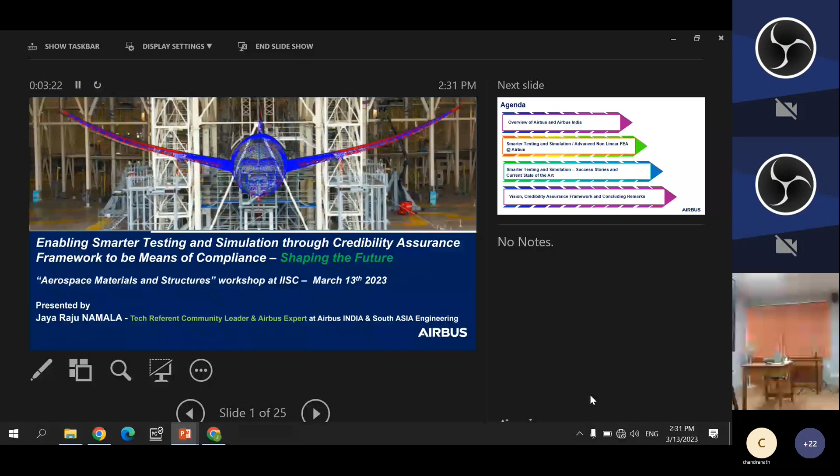So before getting into the topic of our interest, which is advanced numerical simulations, I will probably give a very brief overview about Airbus. Then I'll talk about the technology, the vision, and how we are going to achieve it going forward.

So Airbus, I believe, probably doesn't need recognition, especially for those who are well versed with the aerospace industry. It's a world leader in the commercial aircraft segment and a global pioneer in general for the aerospace industry. We have a product family ranging from the A220, which we got from Bombardier to revive the program. Then we have the A320 family, which probably is the best-selling aircraft in the history of commercial aviation. Then we have the ever-reliable A330 and the new technology A350. And last but not the least, my personal favorite, and I worked a lot on this aircraft, the A380.

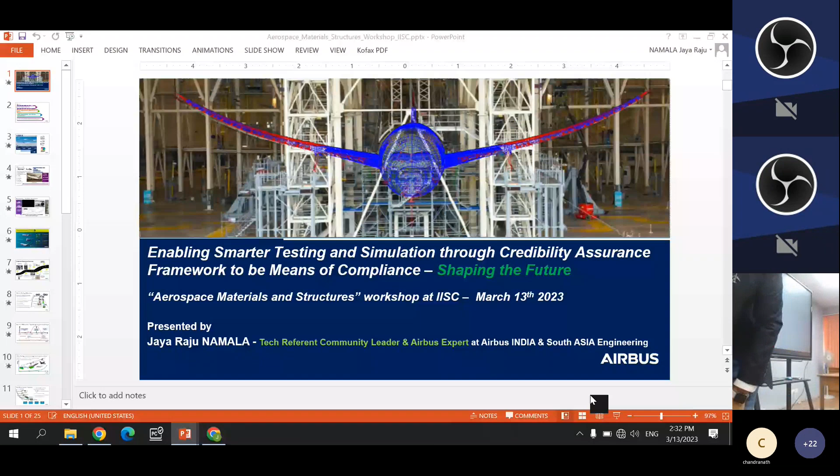Sorry for the interruption. No problem.

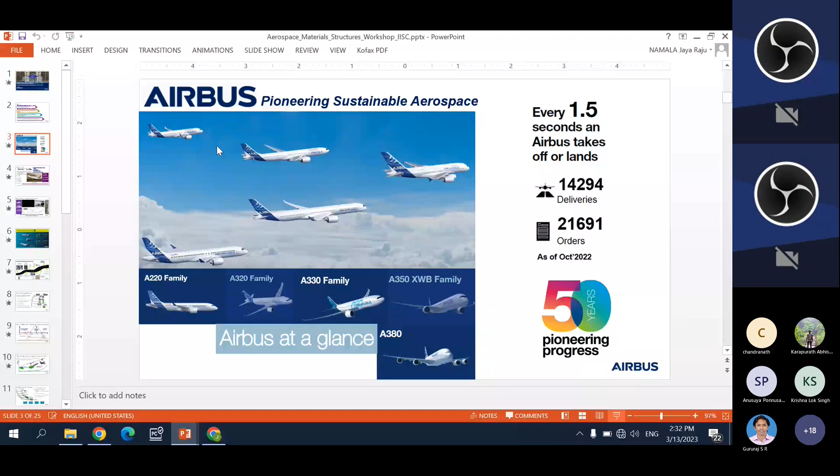Yeah, so I was talking about the A380. It obviously was loved by everyone for the comfort and the noise levels it produced. Unfortunately, it wasn't a commercial success, and we had to stop production of it a couple of years back. So I'll be more than happy if the market demand kind of grows again and if Airbus decides to reintroduce that into the market. I have a very cool stat which says that every 1.5 seconds, an Airbus aircraft either takes off or lands, thanks to more than 14,000 aircraft which are in operation. And I'm very sure this stat will only get better as we have more than 7,000 aircraft to be delivered to several airliners over the next decade or so.

So having talked about Airbus in general, I want to take you to the association of Airbus with India. It all started in the 1970s, even before I was born. By the way, I'm not that old. After that, Airbus did not look back. Currently, we command more than 70% of the fleet share and more than 60% of the order share. And recently, as you know, Airbus secured a massive order from Air India, and these figures don't even account for that.

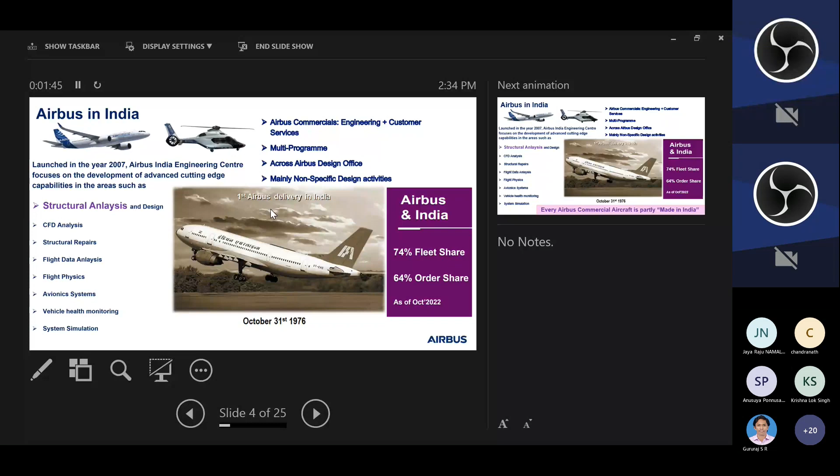In 2007, Airbus got into India and launched an engineering center. Now we have more than 1,200 engineers working on cutting-edge technologies such as advanced structure simulations, fluid dynamics simulations, and physical systems, avionics software, so on and so forth.

Just to name a few. But the fact that we probably can be quite proud of at Airbus is that almost every aircraft is partly manufactured in India, and this proportion is only going to go up with the push the Indian government is placing on major OEMs through the Make in India initiative. Airbus is very much committed to furthering it going forward.

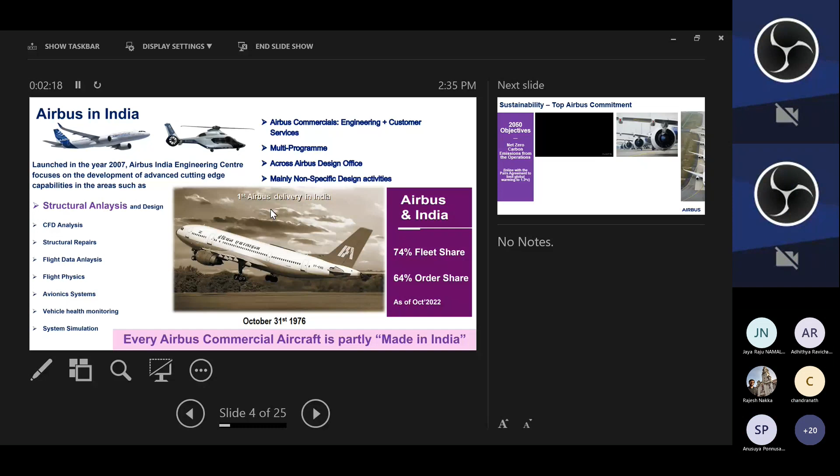So coming to the topic of sustainability. Looks like there is someone else speaking there. You asked a question about repeatability. Absolutely.

Coming to sustainability, currently the aviation industry is contributing more than 2% of global man-made CO2 emissions. Airbus is committed to reducing it and making the aviation industry sustainable, committed to 2050 net zero carbon emission compliance. This is in line with the Paris Agreement to limit global warming to 1.5 degrees Celsius.

But if you look at history, if you look at the relative fuel burn per seat from the 1950s to now, there has been a substantial reduction in fuel burn, thanks to the introduction of advanced technologies - in this case, composites. As you can see, there is a significant increase in composites from the start of this century. Now we have more than 50% composites by weight in the A350.

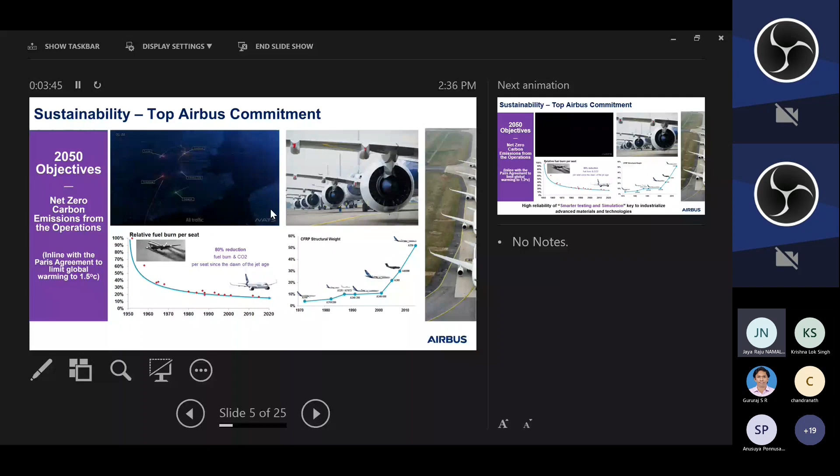This is where, according to me, we are going to introduce many advanced technologies, be it ALM products, be it functionally graded materials. And according to me, in order to industrialize it, advanced structure simulations is going to play an instrumental role going forward.

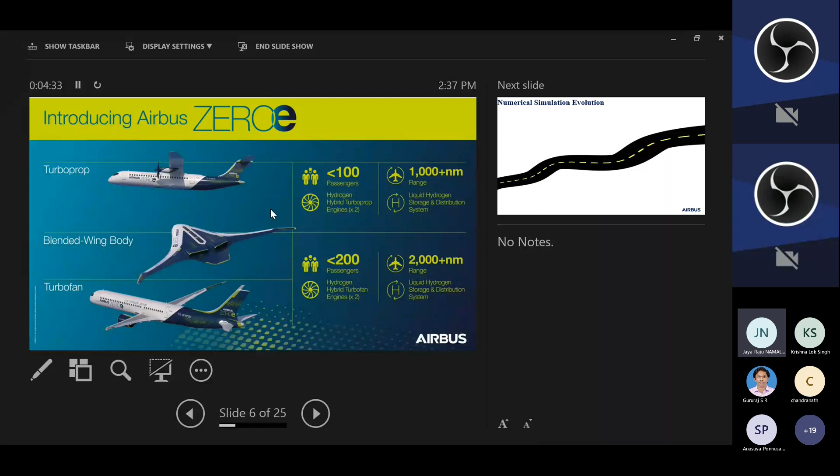And that probably sets up today's talk on numerical simulations. Just for the student community - professors who already know about the evolution can bear with it for a couple of minutes. It all started, as you know, from the 1950s, when the first paper on FEM was launched or released. I would encourage the student community to read this paper.

In fact, this paper also has recommendation sections, and probably the author Turner had great foresight. He recommended improvements to this technology, and I can tell you many of them are in place now. Needless to say, this technology has weathered the test of time and grown by leaps and bounds.

After the introduction of the commercial software NASTRAN, the industry adopted it, and currently we are using finite element analysis significantly during the product life cycle. At Airbus, we have been using linear and conventional FEA from the 1970s, but I would say from 2005, the usage of advanced nonlinear FEA has seen a significant increase.

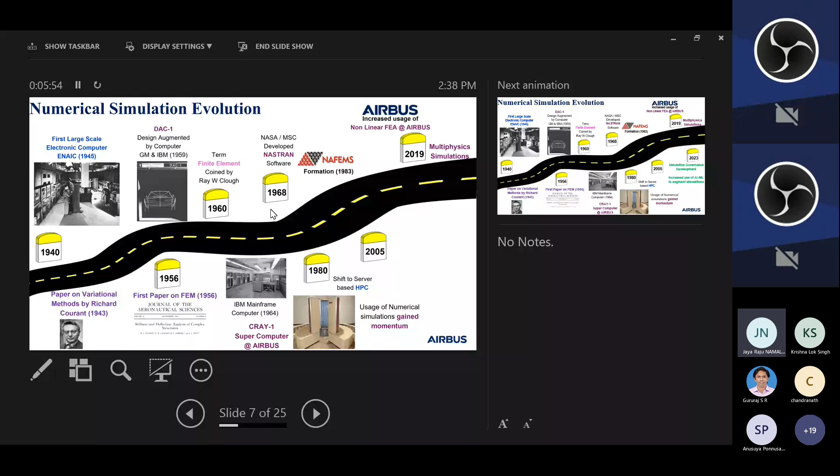And currently, we are actually looking at developing nonlinear FEA as a potential means of compliance by developing simulation governance at the industry level, which I'll talk about later. We are also looking at augmenting simulations using AI and ML technologies as well.

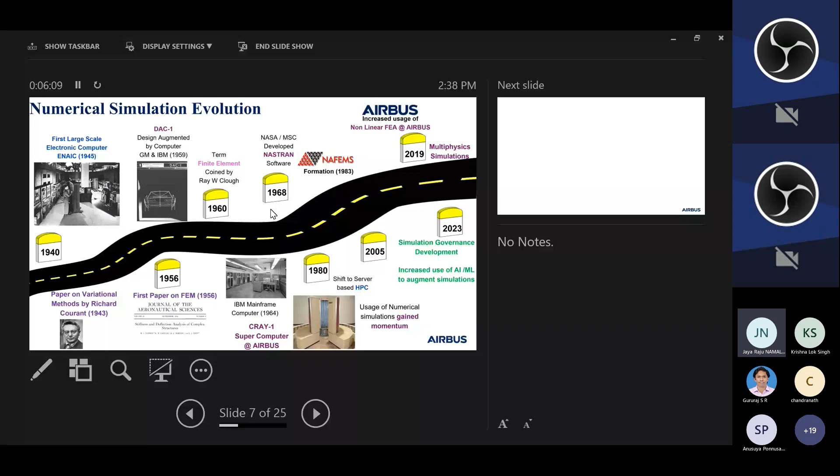So you all must be wondering, when will the topic actually start, right? Probably I think this is where the actual topic starts. The definition of virtual testing, according to me, is a representation of structure and predicting the structural integrity under diverse loading conditions using advanced nonlinear FEA.

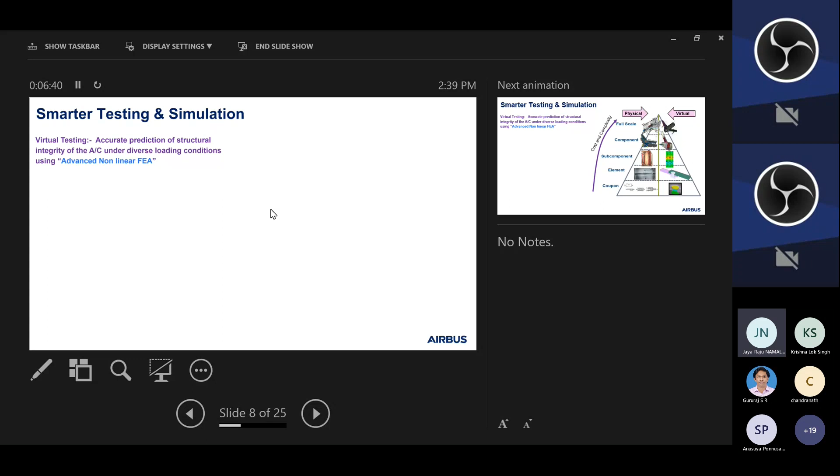Smarter testing and simulation is actually a marriage, according to me, between physical testing and virtual testing. You can see the word 'smart,' right? I'm not really sure whether people will agree that getting married is a smart move, right? But for the industry, this is where physical testing and virtual testing can support each other. I'll talk about it later, how they support each other.

Probably in simple words, physical testing helps in developing virtual testing methods. And virtual testing, especially at the upper level of the pyramid, supports physical testing in terms of de-risking them.

So we are talking about a significant increase in cost and complexity as we go from coupon to a full-scale aircraft level. Can anyone tell me a rough order of magnitude cost of a full-scale aircraft testing, which you saw on the opening slide, wherein the A350 was tested for certification? Rough order of magnitude. Yeah, obviously gross for sure - just some number in millions.

Okay, 300 to 400 crores. Right, anyone?

So we're talking about potentially much more than 100 million, depending upon the size of the aircraft. But probably even the smallest of aircrafts, we're talking about more than 100 million, and it is extremely important that we execute it properly.

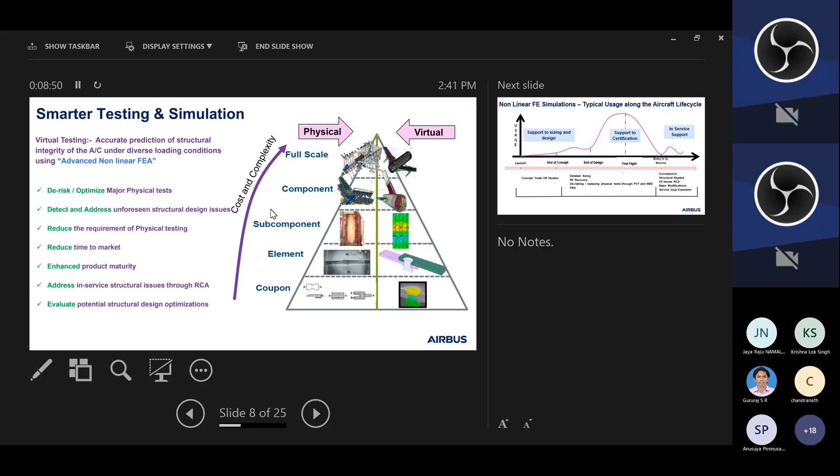So, as I said before, we use linear and conventional FEA analysis, and we use advanced nonlinear FEA. Linear FEA is mostly used during the sizing phase, during the design phase, where the structure is sized to approximate dimensions. Later, advanced FEA is used to validate the structure, to identify whether we have any unforeseen structural issues.

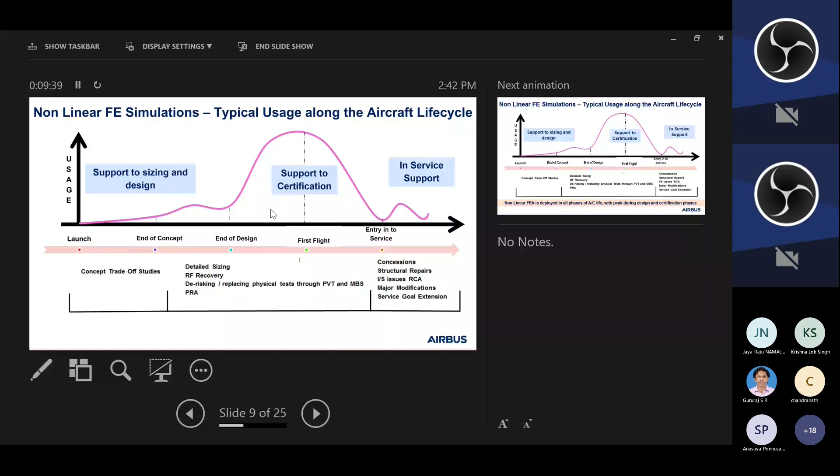So if we look at the usage of virtual testing, when I mean virtual testing, I'm talking about advanced nonlinear FEA, it's mostly used in the certification phase to de-risk structures and to support the first flight, and so on. Once we have it, we can also support in-service operations of the aircraft. But going forward, it will be very different. I'll talk about it when I share the vision.

I think this exponential increase was only possible due to advances in computational capabilities. We should also give due credit to analysis capability - commercial off-the-shelf tools I'm talking about - and the validated methods and processes within the organization. Last, and probably most important, is the people skills and experience we have gathered to use such advanced numerical simulations in the industrial context successfully over the last, I would say, decade and a half.

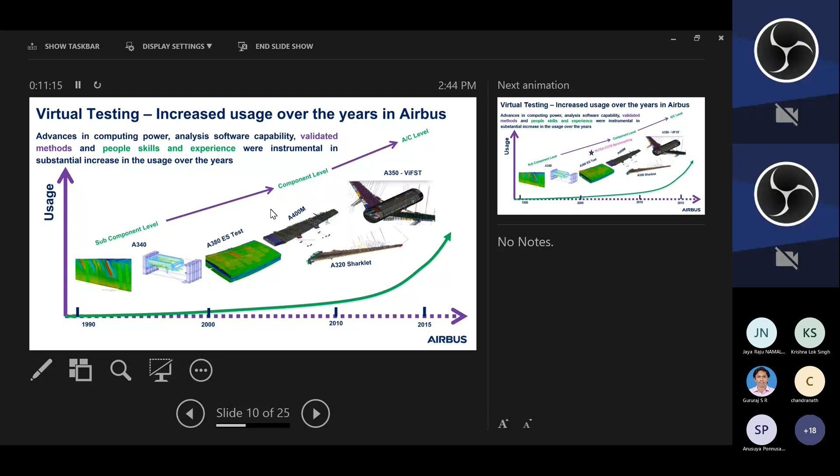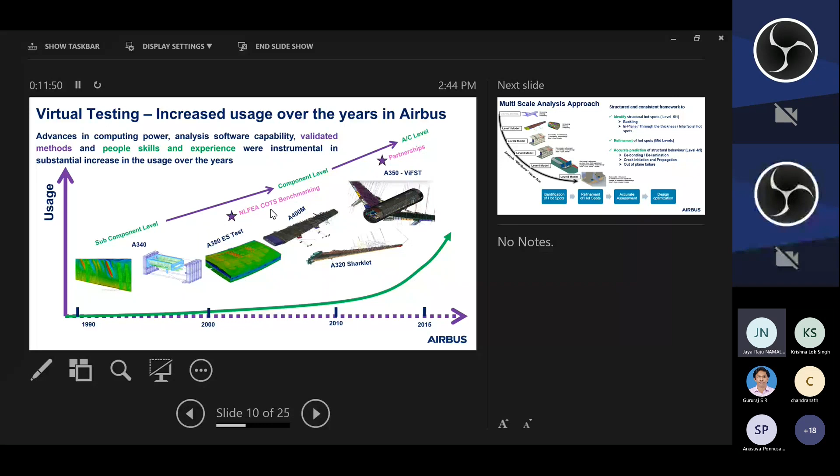We have also partnered with several commercial off-the-shelf tools. In fact, we did a benchmarking in 2005. We assessed many commercial off-the-shelf tools, without naming them, and tried to benchmark them against the quantities of interest generally needed to assess structural integrity. We happened to select Abaqus for advanced numerical simulation. But having said that, the usage of Nastran is significant in the linear FEM domain, as I just mentioned before.

What is also very important is to have a structured and consistent approach to assess structural integrity. In Airbus, we use a multi-scale analysis approach. We start with a very coarse aircraft level model, subject that to diverse loading conditions it can experience in the field, then deep dive to understand local structural behaviors much more closely. Generally, the aircraft and component level models are used to identify structural hotspots.

Potentially it may just identify the hotspots, but we may not understand the root cause. This is where we need to deep dive further. We have, as you can see, levels 3, 4, 5, and detailed models, wherein we capture the structure much more closely, both in terms of physics and geometry, to understand the phenomena very closely.

What you can actually see is, as you go from level 0, level 1, we increase the fidelity of the models. But in the industrial context, it's not just important to have an increase in fidelity - what is also important is to have validation at each and every fidelity level. This is where we carry out physical testing, as you can see, at the coupon, detail level, subcomponent level, aircraft level. So every level you see here has a corresponding physical testing level which is used to validate the fidelity.

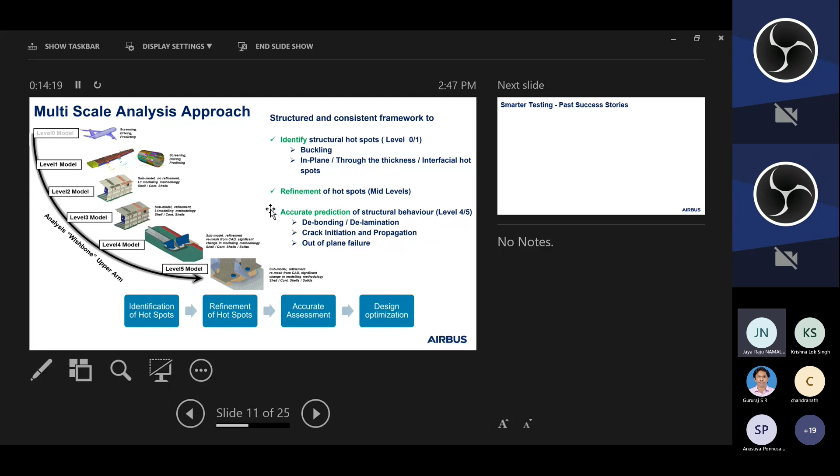So the message I wanted to pass on from the previous slide is mostly the rigor we place in the industry on the validation of every level of multi-scale analysis and every fidelity in terms of representing physics and phenomena.

So having talked about nonlinear FEA, I probably need to also ensure that I keep the audience awake. I would like to give you some success stories. Probably you can connect to them better.

So I talked about the A380, right? How many of you know the A380? All of you? Are you guys aware of it? We all talk about the A380, about the noise levels and comfort it offers to passengers. But an incident happened during the development of this aircraft, during the full-scale static test. The requirement generally is to demonstrate ultimate load capability, which is generally 1.5 times the limit load, and roughly 2.5 times the operational load capability. But the requirement is quite stringent.

And during the physical full-scale testing, both wings of the aircraft failed 3% lesser than the ultimate load. This happened in 2005, when we didn't have the capability of advanced nonlinear FEA. This kind of situation...

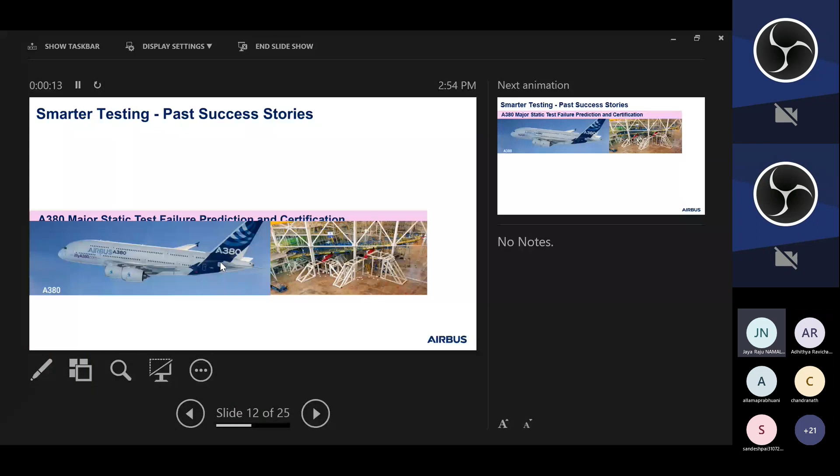So this is one of the important success stories for Airbus, which actually led to increased usage of nonlinear FEA. This happened during the development of the A380, when the requirement was to demonstrate ultimate load carrying capacity. But during full-scale testing, both wings of the aircraft failed just 3% lower than the ultimate load. I was also reminding you guys about the cost of physical full-scale testing, but more than that, the complexity. If you want to redo the test, it may potentially delay the program by, I'm not really sure, probably months or even years, which an organization like Airbus obviously cannot afford.

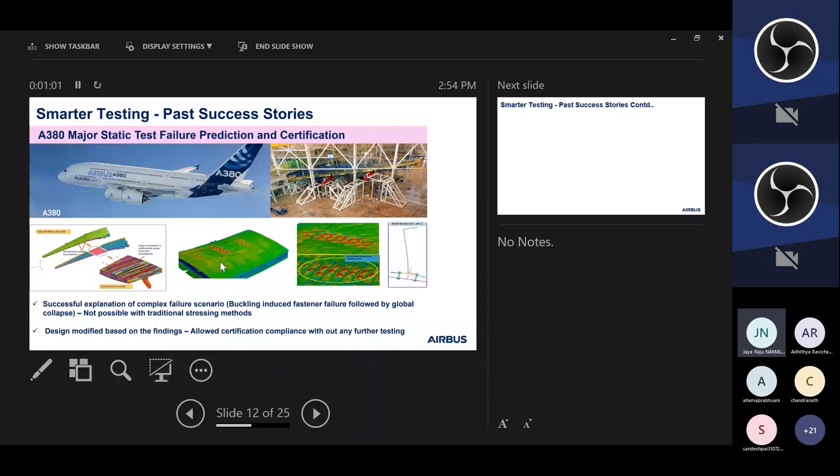This is when we developed subcomponent level models, as you can see. Probably you guys can predict what kind of behavior it is on the top cover. I think Xavier has already talked about it. As you can see, we saw significant buckling. It started with local buckling, and then almost global buckling of the structure, affecting different portions of the cover. It's the advanced nonlinear FEA simulation which helped us not just predict this, but also understand the root cause. Here you can see it is a fastener failure between the stringer and the top cover, which led to an increase in the unsupported length between the stringers, which led to top cover buckling.

This was almost 1.5 decades earlier. We presented these results to the certification authorities, EASA and FAA, and demonstrated the very good agreement between virtual testing and physical testing in terms of predicting local strains in the vicinity, because that's extremely important. You might demonstrate it using nonlinear FEA, but what is the credibility that that's the fact? This is where validation helped us gain their confidence, and we were able to avoid the retest of the A380. Numerical simulation was used to optimize the structure, and without the test, we were able to certify the aircraft. So this was a watershed moment for Airbus, and it significantly increased the usage of advanced nonlinear FEA in Airbus. I need to also mention this was before I joined Airbus, so I don't have any contribution to it. It's in fact Morten who led this program and made it work for Airbus.

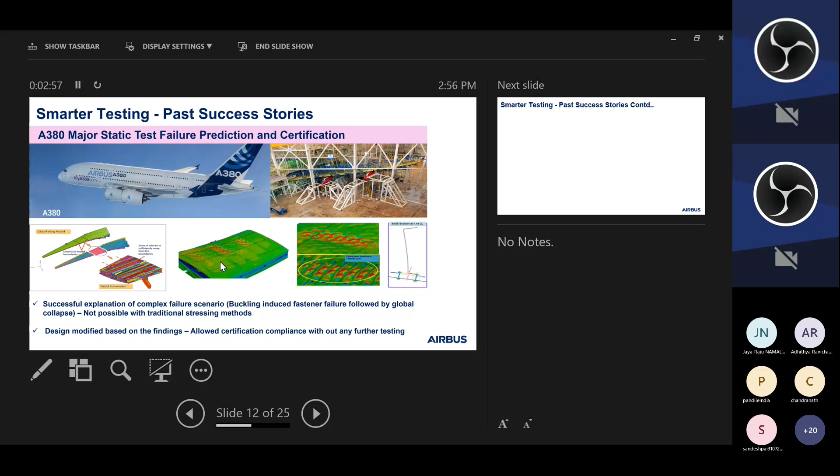And I'll talk about one in which I'm involved. This was during the A320 Sharklet development. I'm pretty sure many of you might fly in the regional A320s. By the way, I think 80% of regional aircraft in India are A320s, so I'm pretty sure most of you have traveled on one. Around 2012, Airbus decided to add these Sharklets, or wing tip devices, to reduce aerodynamic drag and improve fuel efficiency. But that significantly increases the load on the wing in the vicinity of these wingtip devices. Considering that the A320 was already an established aircraft, we used nonlinear FEA to assess the structural integrity of the wing.

There was a question: you demonstrated it at a subcomponent level, so how can we ensure that the results produced at the component level are credible?

So that's when we launched a wing level test in the UK. We took on the challenge of predicting the failure load, mode, and location before the test. It was mostly a blind prediction, done before the physical test. We communicated the results about a week before the physical test happened. You can see this is the wing level model which we developed.

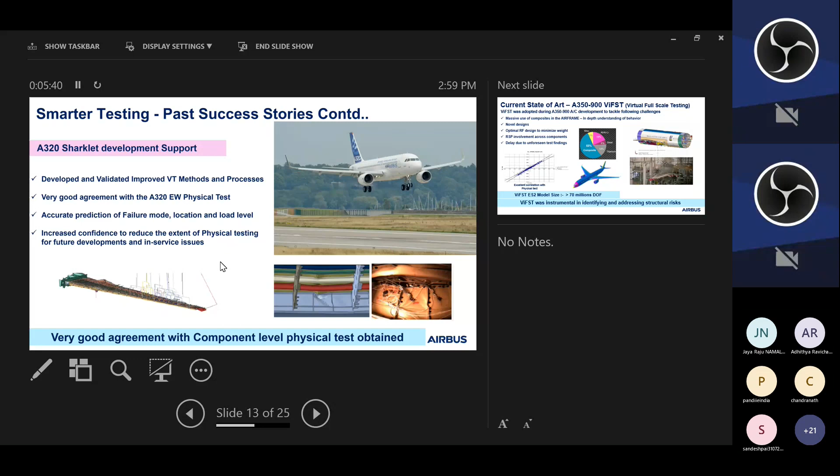We were surprised by the level of correlation we achieved, with very good agreement in terms of load, mode, and location. That gave us confidence to move much higher and use aircraft level models.

Last but not least, this was a full-scale aircraft program after the A380, and Airbus obviously cannot afford to undergo similar challenges as it did during the A380.

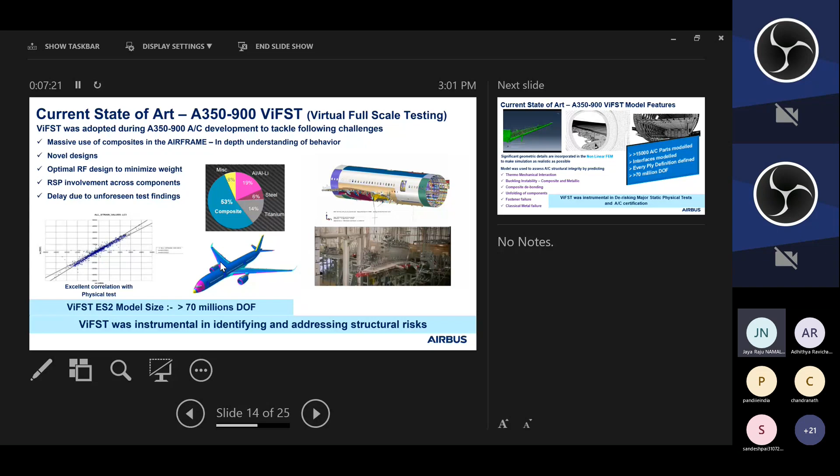What you're actually seeing here is a level 1 component level model. We have built much more detailed models to understand the behaviors more closely.

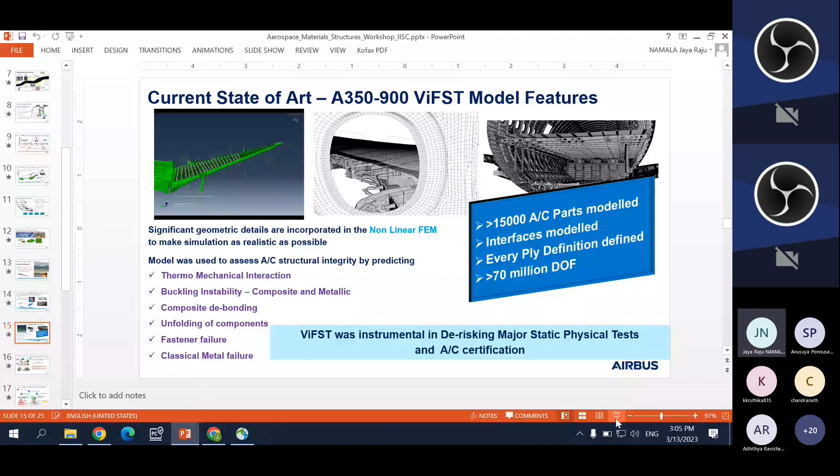So just to continue, the models we developed for the A350-900 during its development are capable of predicting all these different failure modes. If you observe closely, we have all the complex failure modes: composite de-bonding, buckling instability, metal failure, fastener failure, and so on.

But there is one failure mode which is missing, which we are still working very closely with academia to master, which is composite delamination. We are currently working with Imperial College London and the ONERA Laboratory in France to develop a model which can predict composite delamination much more closely.

We have methods within Airbus which are potentially a little on the conservative side. Obviously, when you don't master a phenomenon, you need to be conservative. But we want to bridge that gap between physical reality and what we simulate numerically.

So these models which we developed were instrumental in the glitch-free certification of the A350-900.

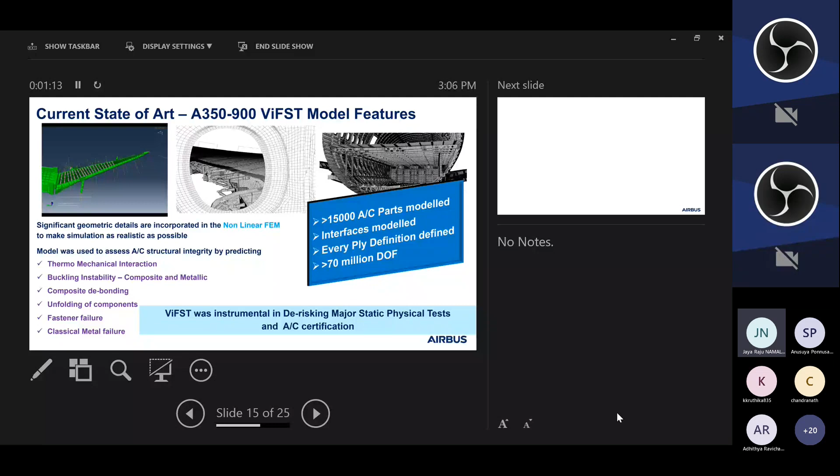In addition to the static applications I talked about, we also use transient dynamic simulations to understand the impact of dynamic events such as bird strike, hail strike, tire debris, and so on, as well as crashworthiness events and ditching.

Any of you know what ditching means? Water. Exactly, water landing.

You probably know Captain Sully was able to land an A320 on the Hudson River. You can thank simulation for that. During the post-accident investigation, I'm told evidence was presented that the aircraft was indeed developed for potential ditching.

So when we generally talk about simulations, we do not really connect to the bigger picture of what impact it can actually have. We mostly concentrate on local stresses and strains, but I think we should also connect to the bigger picture and the kind of impact it can have on the aircraft program.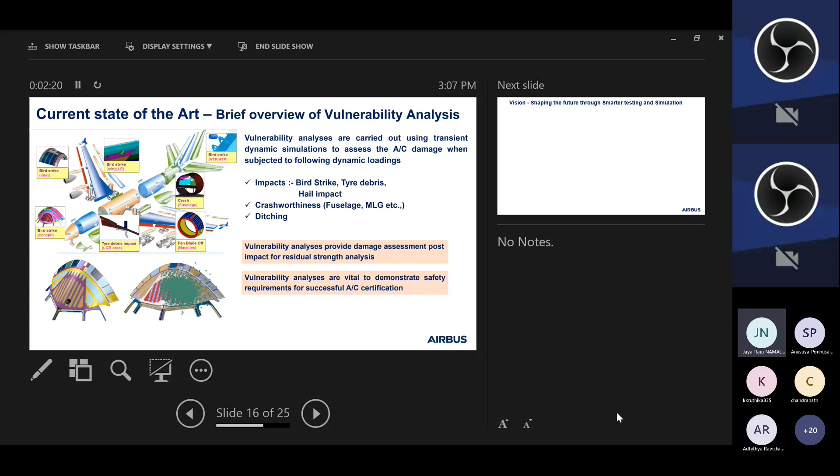Okay, now that I talked about the current state of the art and the success we have achieved recently, I will take you through what is the vision.

Currently we are mostly using it during the certification phase and probably in service. But going forward, our vision is to use advanced NLFEA during the sizing phase itself and increase the fidelity of the model gradually, because during sizing we need fast reactivity as the loads evolve, as the structure evolves, as the requirements evolve. It's important for us to be very reactive, and this is where we are developing this technology to build nonlinear FEA models very fast and adapt to fidelity requirements as we go towards certification.

As I've already talked about, the success stories give us confidence that we can develop a model which potentially can replace full-scale testing.

So the idea is to replace full-scale testing, which will lead to reduced time to market. When I say reduced time to market, it is to reduce the aircraft development time. For A350, we took more than 8 years to develop. Now the challenge within Airbus is, can we reduce it significantly?

Needless to say, if we use advanced NLFEA right from the scratch, we can understand the physical behavior much more closely. So we're talking about much enhanced product maturity. And if you can eliminate full-scale testing, we can reduce the cost and also reduce the development time.

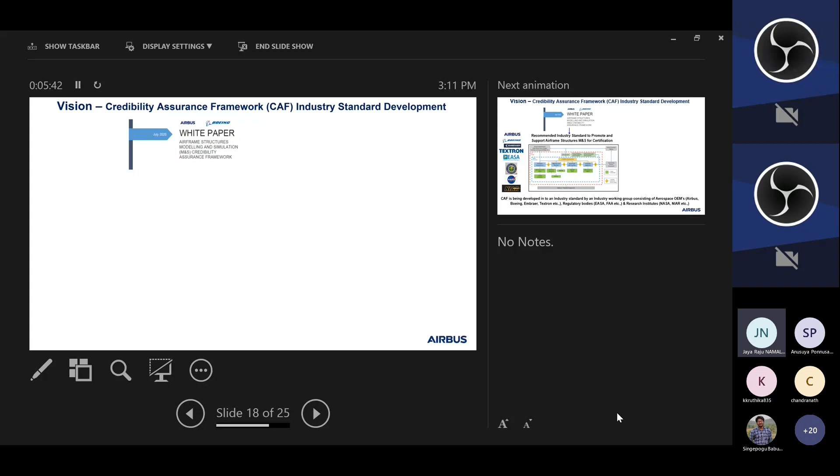Once we matured it, we, along with senior experts Morten Ostergaard and Michel Mahe, collaborated with Boeing to release a white paper in the year 2020, and that was very well received by the aviation industry.

Currently, we are developing an industry standard credibility assurance framework, which includes Boeing, Embraer, and also research institutions, NASA, NIAR, and most importantly certification authorities as well, to gain their acceptance. Chiara from TU Delft is also part of the industry working group developing this credibility assurance framework.

Are we building everything from scratch? Are we reinventing the wheel? Not exactly. We are getting inspired by many technical standards available in the literature. The NASA technical standard gives a lot of recommendations for demonstrating credibility. We also have the predictive capability maturity model from Sandia Labs, and the ASME V&V verification and validation guides to support us on this.

So the idea is to develop a means which industry can use to demonstrate credibility of advanced nonlinear simulations as a potential certification means of compliance and eliminate or reduce testing going forward, at least.

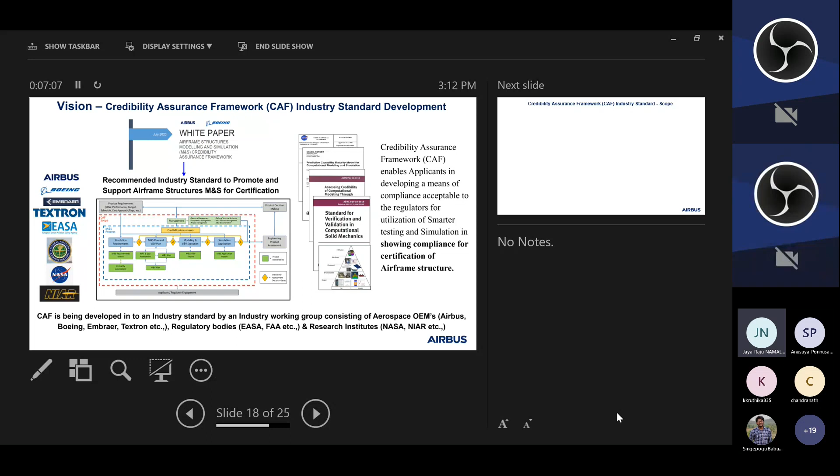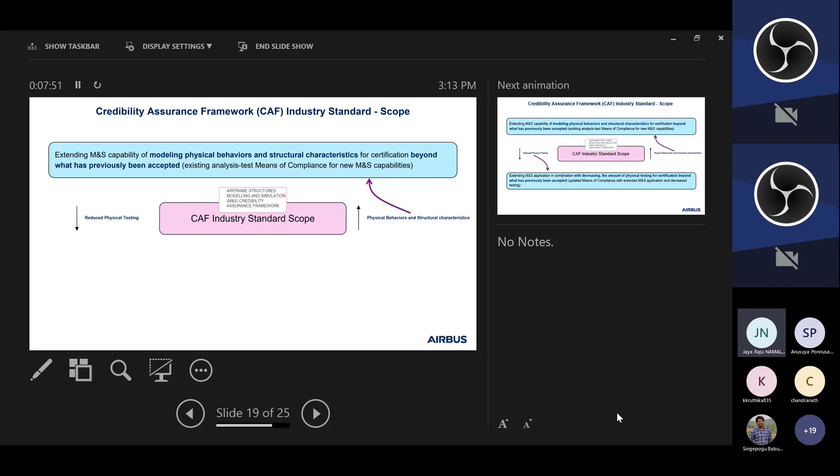So what is the scope? Probably what is very important for us is to understand what will be the scope of this industry standard. Will it completely change the current certification means of compliance? Probably no. So we are talking about two means here in terms of credibility assurance frameworks. One is when you want to increase the physical behaviors and structure characteristics you want to represent using advanced NLFEA, or when you want to reduce the physical testing currently accepted with the authorities. So that is either to use existing analysis testing means of compliance, but to represent much enhanced physical phenomena, or to reduce the physical testing.

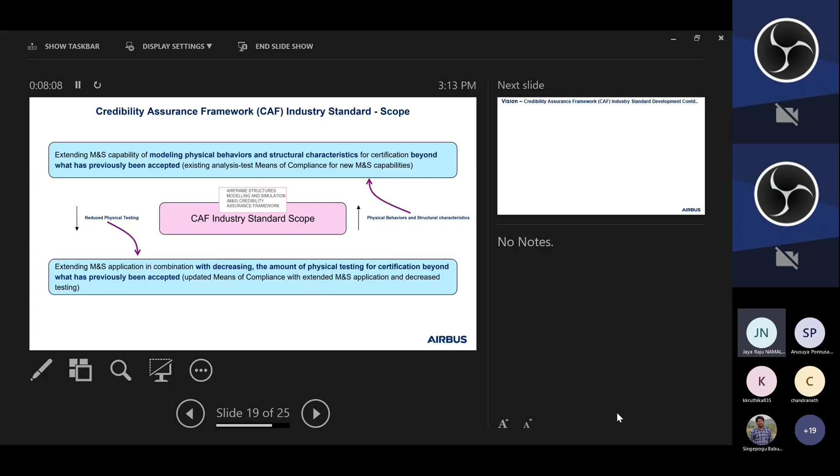In our case, if you want to eliminate physical testing, CAF will probably have to be applied to gain acceptance of authorities. So I'll quickly take you through what this credibility assurance framework is all about. You probably can see, if you carry out any project, I'm pretty sure all of you are working on simulation projects.

If you look at the phases: one, you acquire what are the requirements, understand what is the problem statement, what is of interest, the stakeholders. Then you develop the model, design it, develop and validate it, and finally apply it. The phases are very similar, right?

But the credibility assurance framework recommends a lot of strategic tools. The first one is called criticality assessment. This helps understand how much rigor the analyst should place on developing detailed models if you want to eliminate or reduce testing. Here there are two metrics which need to be looked at.

One is what is the influence of your simulation on the decision you're going to take. Say you're developing a model and you have both physical and virtual testing, and virtual testing is only supporting the physical testing — then the influence of simulation is not so much, because you still have a supporting means. But if you're only using simulation to design, then possibly the influence is much more. And if you're talking about a structure such as a wing, which is a primary structural component, then the design consequence will also be very high.

So depending upon how critical the structure is and what is the influence of modeling and simulation in taking the decision, we come up with a criticality score. The higher the criticality score, the more rigor we need to place in carrying out the modeling and simulation. Another important tool I'd like to briefly take you through is called Phenomena Identification and Ranking, and maturity assessment.

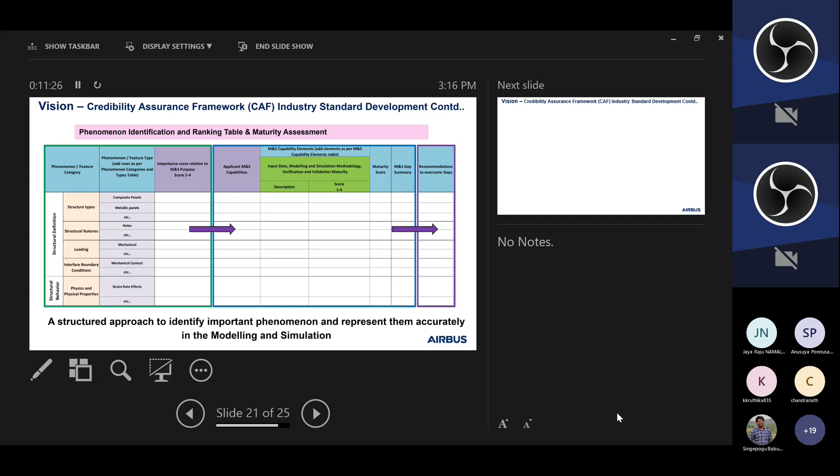So I'd recommend you use this in your projects as well, to make it much more structured in terms of how you represent physics and predict realistic structural behavior. I won't take much more time, but I'd like to emphasize a lot on verification and validation — according to me, it is of paramount importance.

You develop a model and you directly go to the application domain. In my experience interviewing people for potential positions, what I see is that in academia, the focus on verification and validation isn't so much. I'm not saying there isn't any, but students probably need to focus much more. This is where you ensure that your model is the right representation of physical behavior.

In verification, we also check whether the input data is of the right standard. Then there's computational model verification, code verification — which code are you taking, how credible is it — and calculation verification, which covers mesh sensitivity and so on. As part of the credibility assurance framework, which we've thought a lot about, we also recommend something called physical plausibility checks. This is something new in the credibility assurance framework, which you may not see in other standards.

Here we recommend the analyst, and potentially a group of subject matter experts within the organization, to critically think: is the model behavior in line with what we expect? Probably based on your previous experience, or potentially in terms of critical locations where you may predict hotspots.

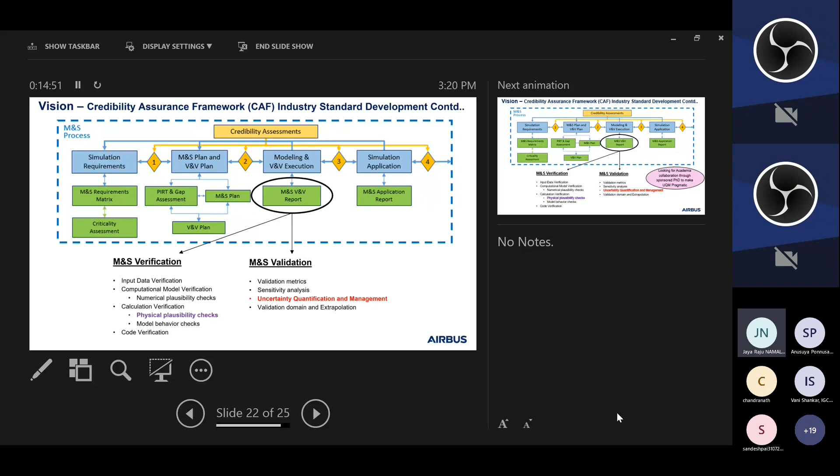We probably need to think of more intelligent means. We are currently at Airbus looking at directional sampling methods, so on and so forth as well. And this is where we are planning to sponsor a PhD and collaborate with academia to further improve uncertainty quantification and management technologies which we use in Airbus.

In fact, in the recent CAF workshop which happened at TU Delft, rightly sponsored and very well sponsored by Chiara, when we discussed with the certification agencies, there was a clear message: if you want to eliminate full-scale testing, the organization should be capable of applying uncertainty quantification at the right level. Don't apply it, then regardless of how good the validation is, there is a real possibility that we may not meet the requirements in terms of credibility.

So this is extremely important for us, and we are placing a lot of focus on this going forward in Airbus as well. What is also more important is once you have the validation, you define a validation domain and apply your model within that domain. Generally we validate using different testing, and then without understanding what is the structure, what is the loading, what are the different physics, we may apply to a different physical domain. So this tagging between where we apply and for which domain we validate is extremely important as well.

So that probably sums up the credibility assurance framework, and the industry standard currently is still in progress. Hopefully we will develop it and release it to the industry and to the outside world.

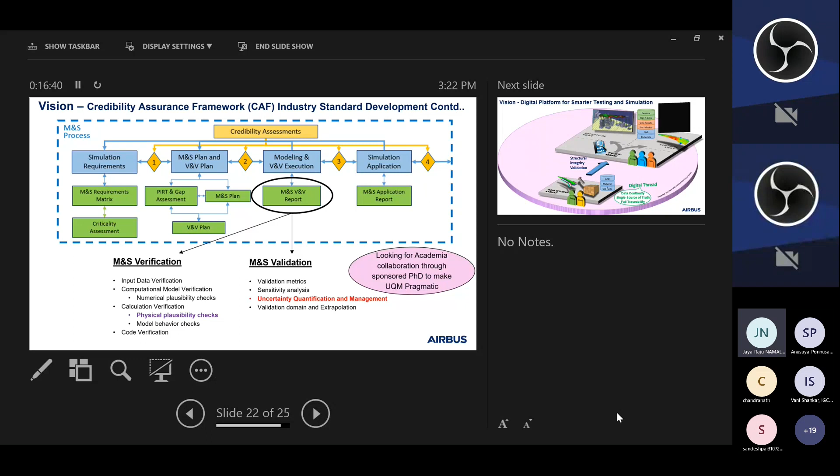So having talked about the credibility assurance framework within Airbus, as I said, smarter testing and simulation is a marriage between physical testing and numerical simulations or virtual testing. And these two departments were actually working independently with each other - I mean, they were completely independent, right?

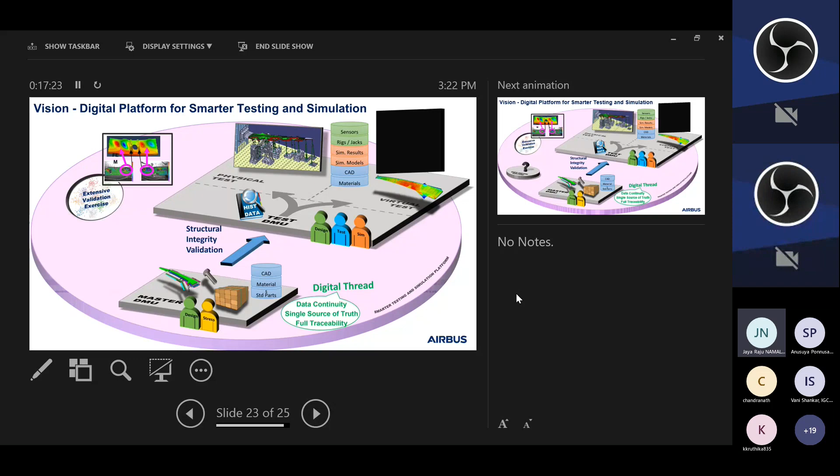The idea is now to integrate them, and we are developing digital platforms within Airbus to seamlessly integrate the physical testing and the virtual testing, and also integrate different domains such as design, stress, and so on. This data continuity and having a single source of truth is extremely important to understand the kind of validation we have between the physical structure and the numerical structure, and finally take the right decision in terms of whether we have the capability to represent the structure properly or not.

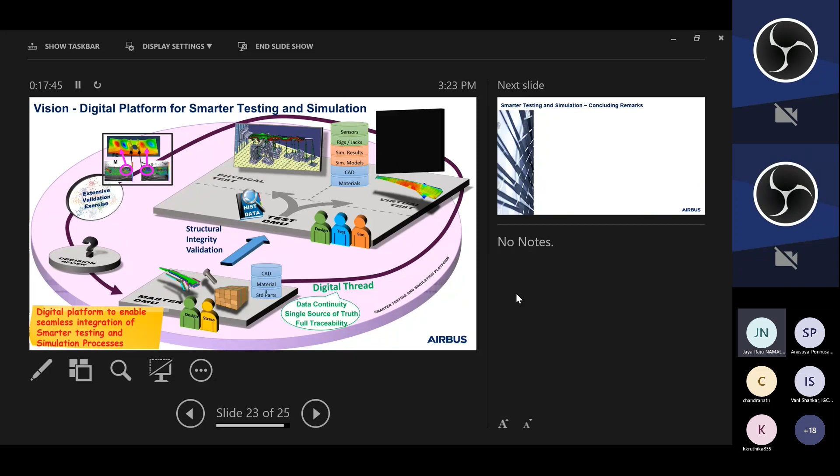So that concludes my talk, and in a nutshell, I just would like to let you know that at Airbus, over the last one and a half decades, we have used nonlinear FEA simulations extensively, as you have already seen, to solve some of the most challenging and complex structural problems, be it on A380, A320 Sharklet, many in-service issues as well. And if any of you are planning a career in this, we'll be more than happy to welcome you at Airbus.

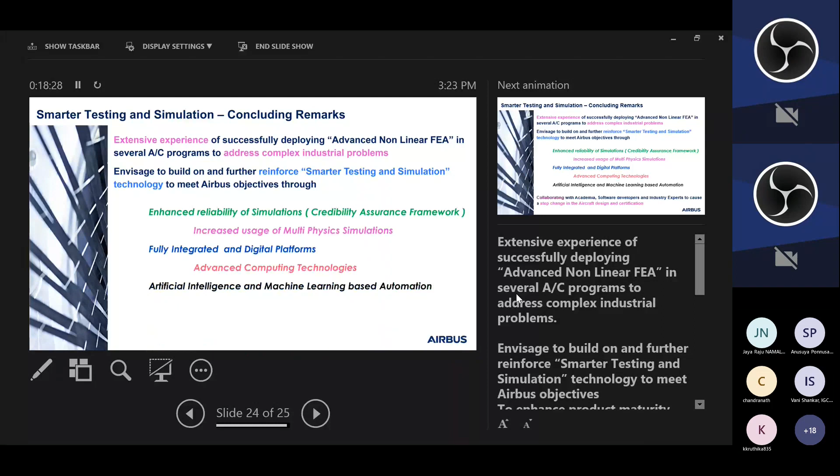And as I said, we have a vision to establish it as a credible alternative to physical testing through the credibility assurance framework and developing digital platforms. One technology I haven't talked much about is the usage of artificial intelligence and machine learning. I can talk about it in the future, but we are currently working on machine learning based physics-informed neural networks, to reduce our dependency on high fidelity models, but use low fidelity models to augment the physics using these physics-informed neural networks. Just wanted to mention it in a couple of sentences.

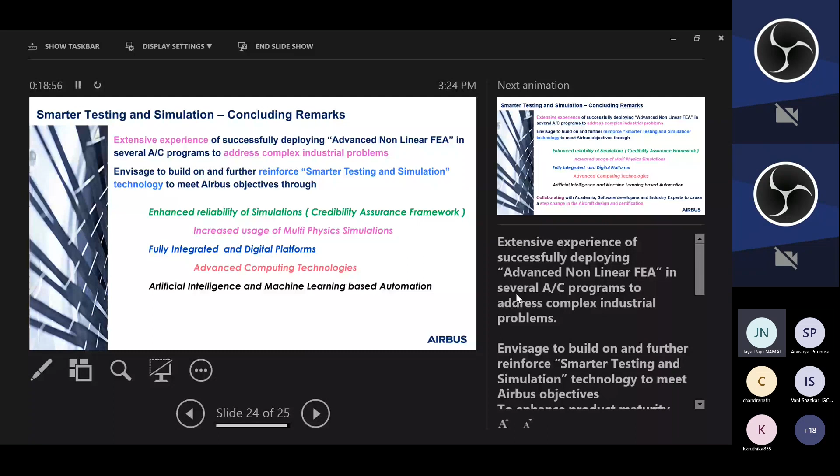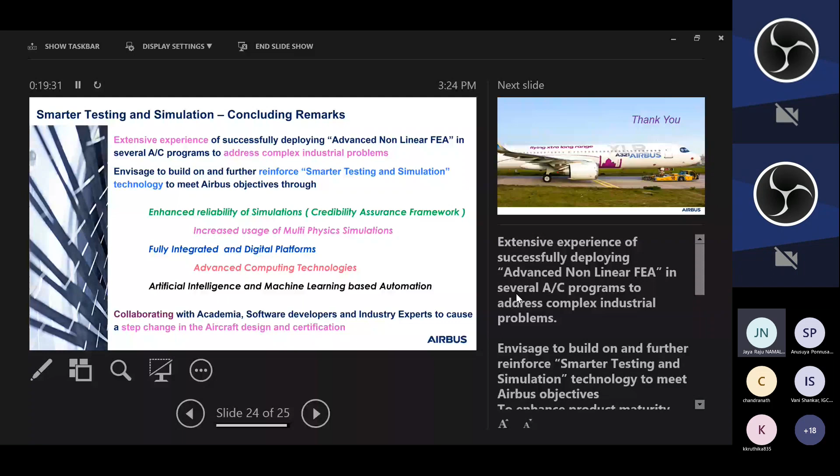So in a nutshell, we are working on our vision internally within Airbus and collaborating with industry experts and academia to cause a step change and a paradigm shift in the way we potentially will design and certify our next Airbus aircraft. Thank you very much, and I hope I was able to at least keep you guys awake. If you have any questions, I'll be more than happy to answer.

Whatever you have shown is for static tests. What about fatigue? Can we avoid that? Airbus is working on it, yes. But we need to be humble—fatigue is a very complex phenomenon, and we are not thinking of eliminating fatigue tests in the near future. We still need to master many aspects of fatigue, and the moment we think we have mastered it, new issues come out. Currently our plan is to use the credibility assurance framework to eliminate the static test first, and possibly once we master that, we can go to fatigue as well one day. But as of now, we are only limiting the removal of physical tests to static physical tests.

So no crashworthiness either? Crashworthiness is already eliminated—we don't use physical tests anymore for that. I think the senior expert community worked extremely well on this, probably between 2005 and 2010, and we already agreed with EASA that we will not carry out any crashworthiness testing unless it is a completely new structure wherein you have new physics, new loading, new materials, and so forth.

This is exactly what many students ask me. Okay, I can tell you what softwares we use—we use Nastran in the linear domain, Abaqus in the non-linear domain. But the focus should not be on softwares. The focus should be on understanding physics, understanding the nuances, the nuts and bolts of what goes into the simulation. Software is all about probably a month of training, and as you apply it, you would master it.

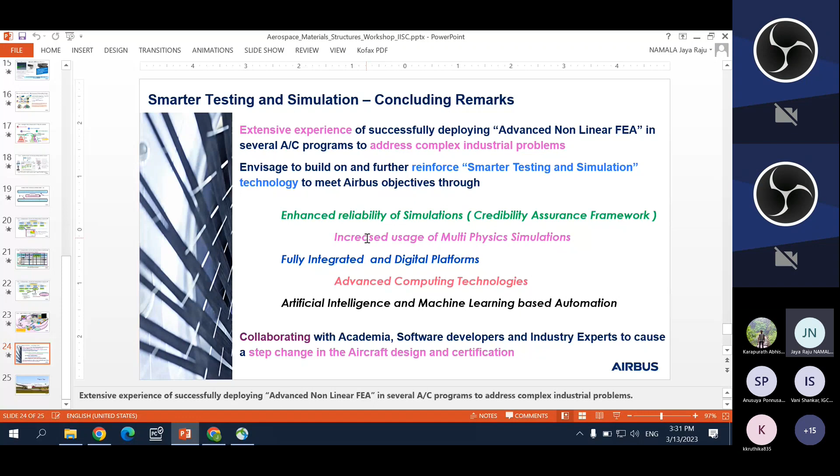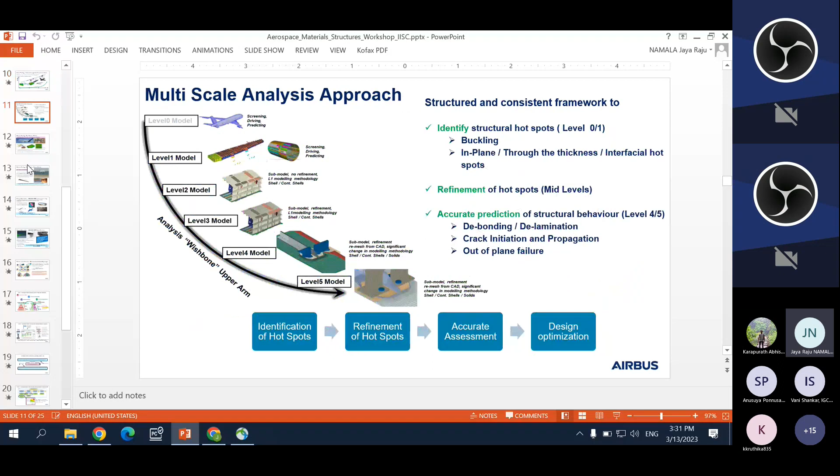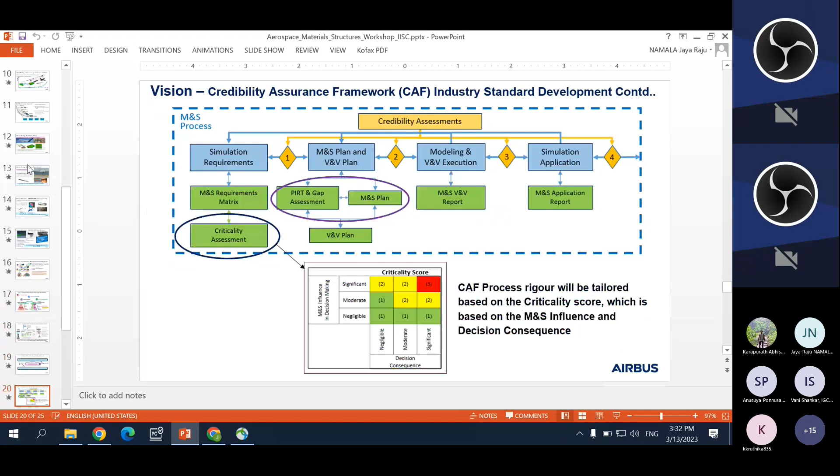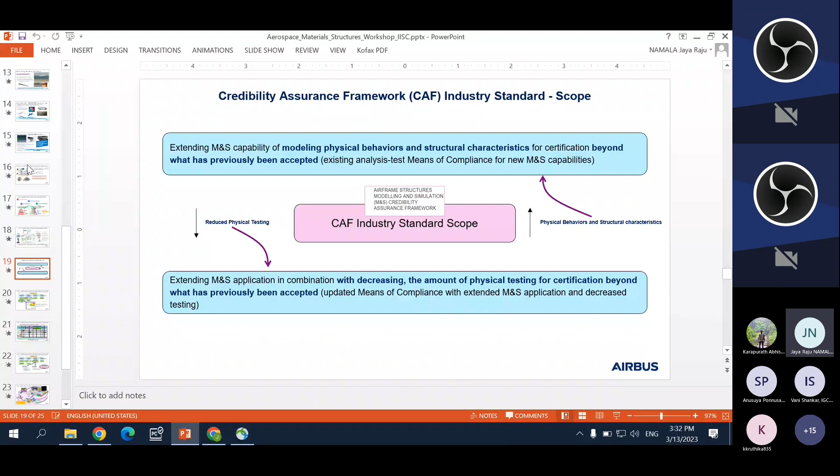So this is what we currently use in terms of application of advanced methods. So the difference is only that you want to accelerate, or is there other? Start using it from the sizing phase itself. Currently we use linear FEA probably till the end of MG5, even though we used to analyze some complicated joints and so forth. But if not, it is mostly the linear conventional techniques which dominate here.

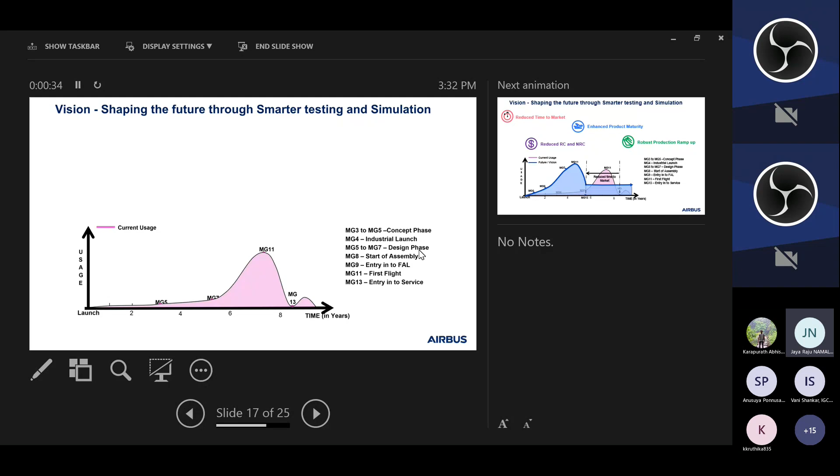And we use advanced NLFEA mostly to validate the structure. Now the idea is not to use it only for validation, but to use it along with sizing. But this is a phase wherein we need to be very reactive because requirements evolve, materials evolve, material properties evolve, loads evolve as well. So we need to be very quick in terms of modeling. That's the reason the idea is to have lower fidelity models used here, but at the same time ensuring we represent the right physics. As we go toward certification, we enhance the fidelity so we are much closer to reality, and then potentially use those high fidelity models to eliminate those cases.

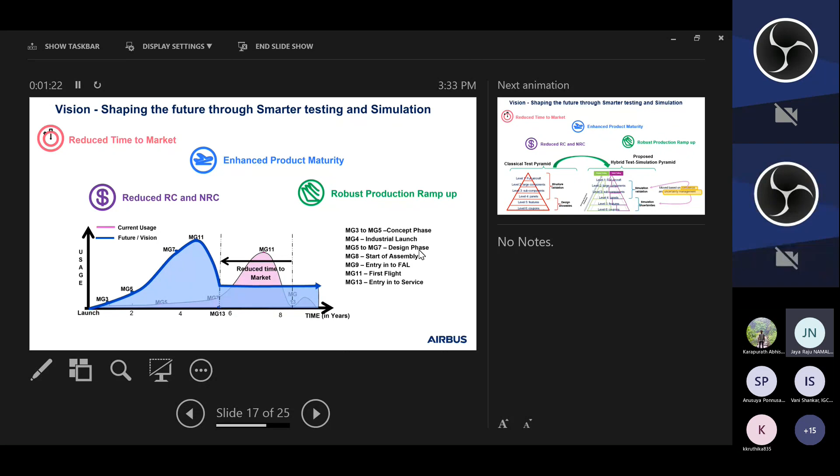But it's also the phase where you need more testing - testing is probably done in this phase. Yes, for sure, and there's extensive testing done across the... let me show you, you can see significant testing done at the coupon level, feature level, panel level. This is where, as I said, we have this multi-scale analysis approach wherein we use coupon level tests to characterize materials, detail levels and features to understand how bolts work, how interfaces work. Then we have panel levels to mostly validate those methods, and finally use some component tests to validate the simulation.

So in a way, we are going from design-level generation and structural validation to understanding structural uncertainties and developing methods and simulation validation. And it's simulation which will be used to validate the structure.